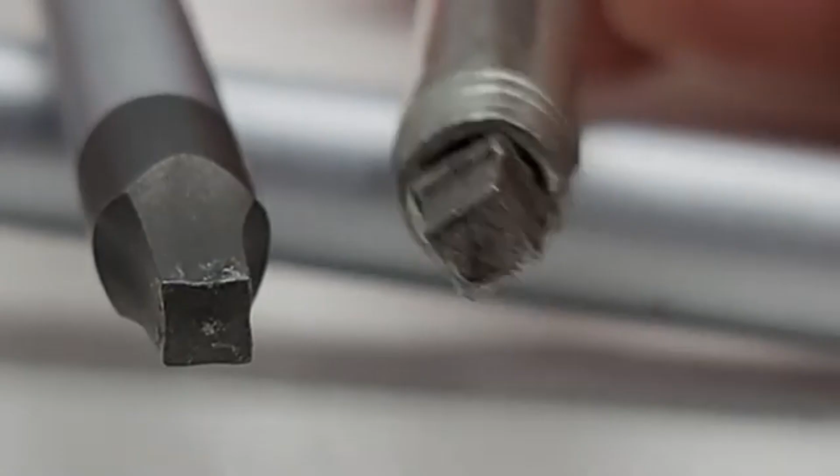In 1913, Henry Ford discovered a tiny piece of Canadian steel that was about to change the speed of global manufacturing. It was a cold-formed, square-drive fastener manufactured in a small brick factory in Milton, Ontario. At the time, Ford was building his automotive empire. Every second on the assembly line cost money.

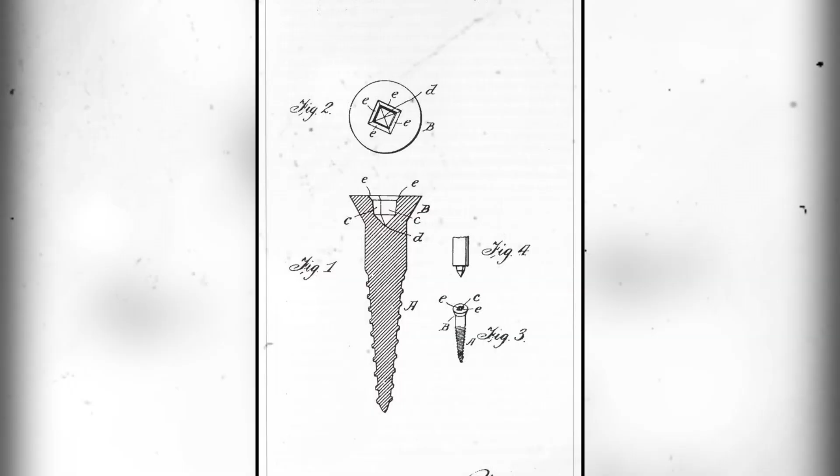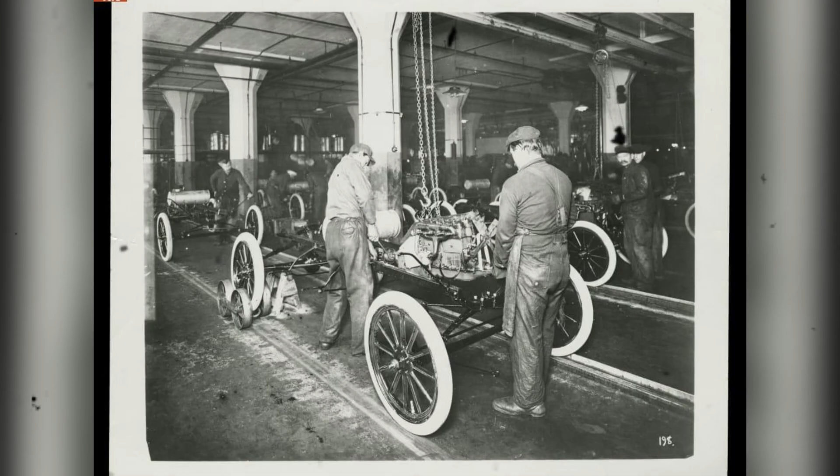When Ford engineers tested this new Canadian screw, they realized the square recess stopped the screwdriver from slipping. It allowed workers to drive screws blind, with one hand, at unprecedented angles. It saved the Ford Motor Company exactly 2 hours of assembly time per vehicle. Ford recognized the mechanical superiority immediately.

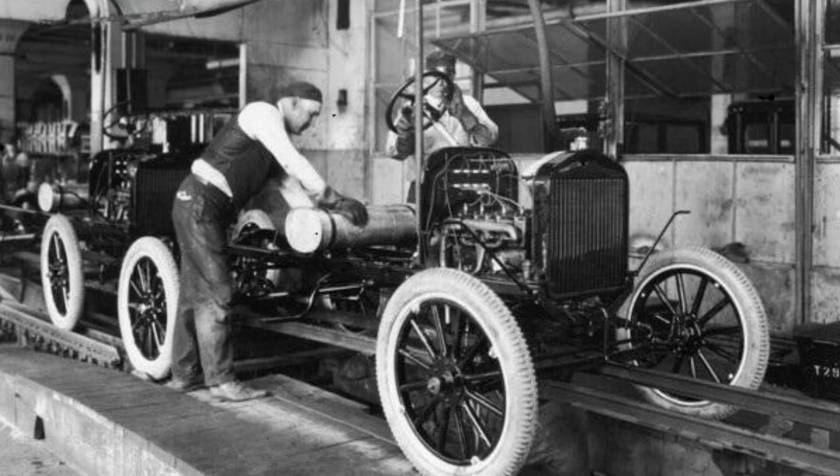He approached the inventor, a former salesman named Peter Lymburner Robertson, with a proposition. Ford wanted the screw. He wanted exclusive rights. He wanted to dictate the manufacturing terms, the licensing, and total control over where the fasteners went.

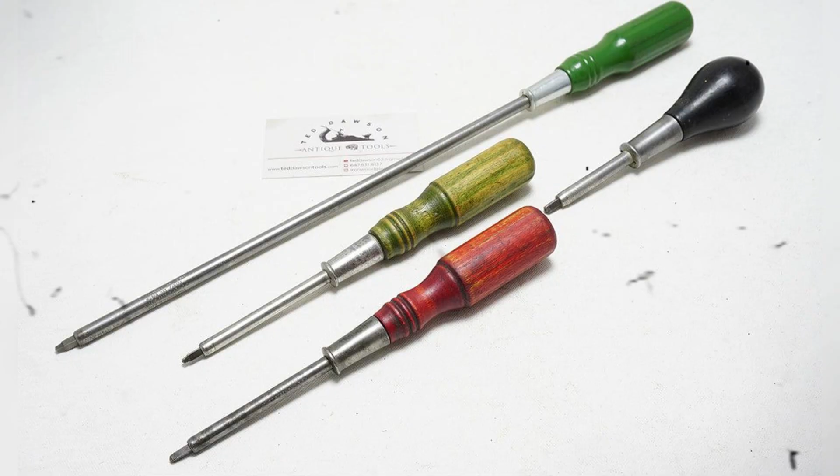Robertson refused. He refused to hand over his patents. He refused to cede control of his Milton factory to American industrial demands. He walked away from the most lucrative manufacturing contract in the history of the early automotive industry. That single refusal fundamentally fractured the North American hardware market. It created a strange, enduring industrial paradox.

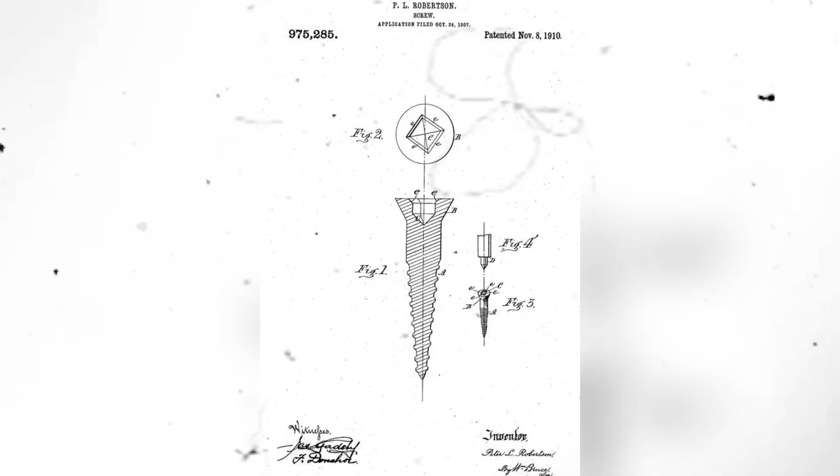To this day, the United States relies heavily on a universally frustrating, cam-out-prone crosshead design. But cross the northern border into Canada, and you will find an entirely different mechanical reality. In Canadian garages, on Canadian construction sites, and inside Canadian manufacturing plants, the Robertson square drive screw achieved absolute dominance. It became the unofficial fastener of an entire nation.

But the cost of that national dominance was international obscurity and the eventual dismantling of the very factory that brought it into existence.

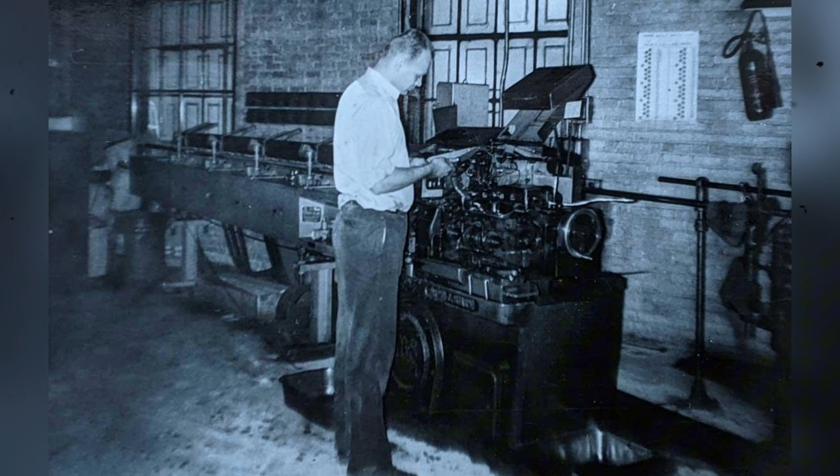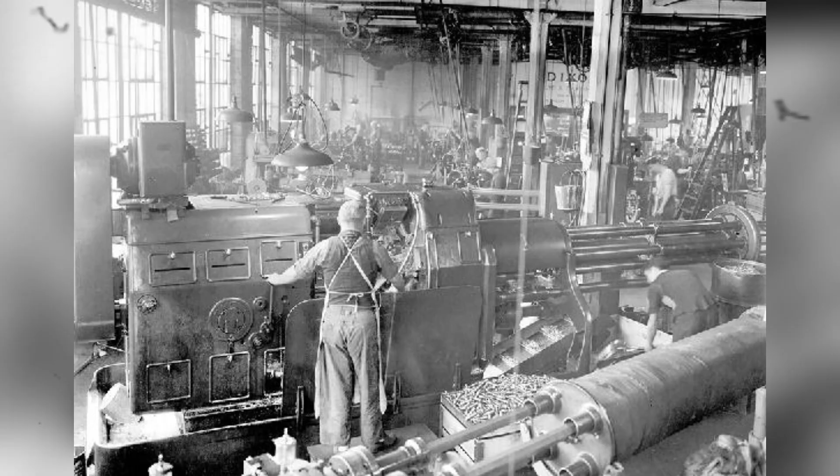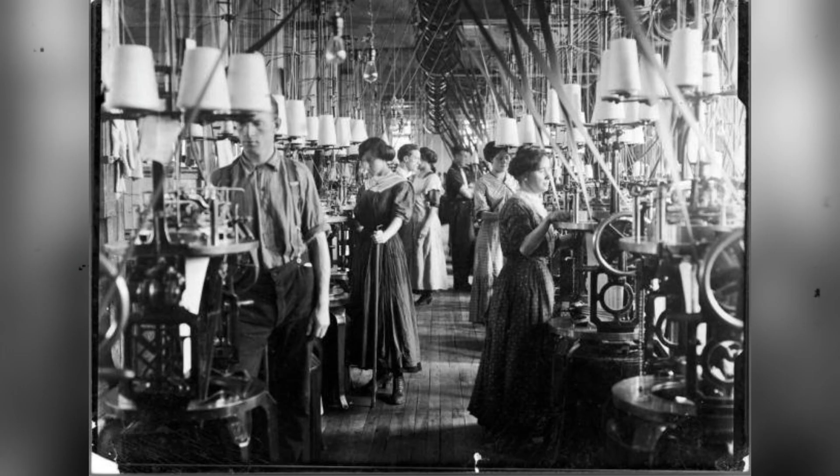Now let us return to the exact moment Peter Robertson realized the shape of the future. The year was 1907. Peter Lymburner Robertson, a traveling salesman born in Seneca Township, Ontario, was standing in a workshop demonstrating a new spring-loaded screwdriver. He positioned the tool. He applied downward pressure.

Without warning, the flat blade slipped violently from the shallow slot of the screw head. The steel plunged directly into his hand. The cut was deep. The bleeding was immediate. Robertson wrapped his hand, stopped the demonstration, and walked away with a profound mechanical revelation. That single physical wound exposed an industrial bottleneck that was quietly costing North American factories millions of dollars in lost time and damaged goods.

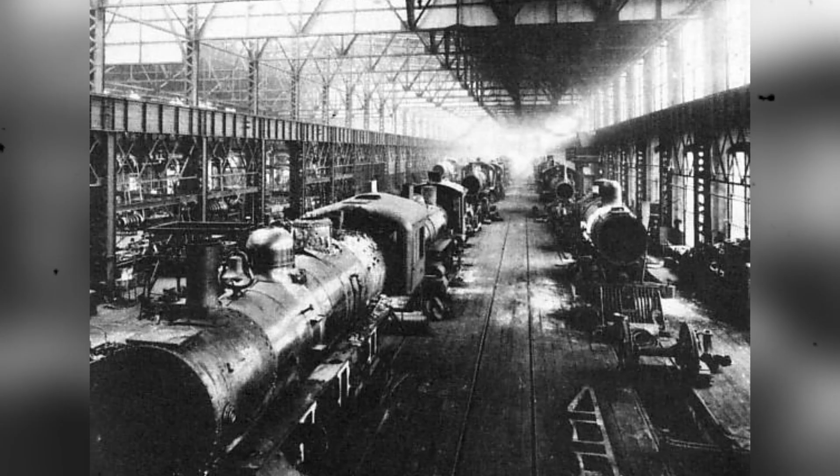Before Robertson filed his patents, the Canadian hardware landscape was entirely dominated by a single, fundamentally flawed fastener, the slotted screw. By the early 20th century, Canadian manufacturing was accelerating. Foundries in Hamilton were pouring steel. Furniture makers in southern Ontario were turning out thousands of chairs and cabinets. Boat builders in the Maritimes were assembling vessels at a rapid pace.

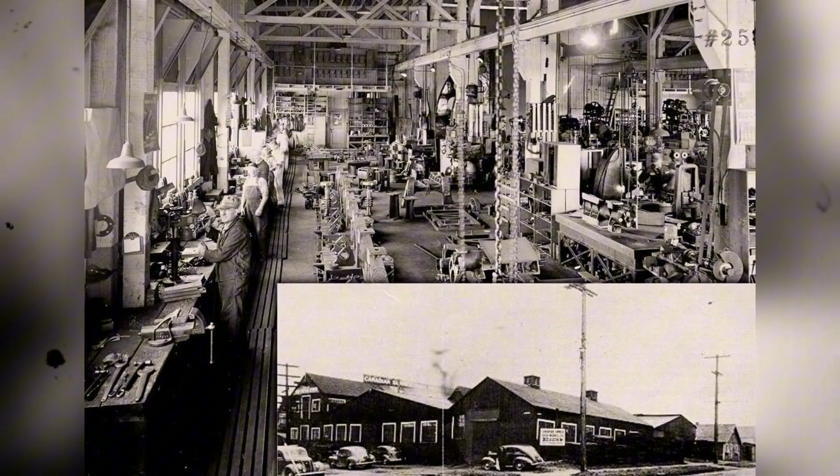Yet the entire industrial apparatus was held together by a screw design that had not changed since the 15th century. The slotted screw, or flathead, was cheap to manufacture because a simple saw could cut the groove. But mechanically, it was an absolute failure for high-speed assembly. It required two hands to drive, one to hold the fastener steady and one to turn the driver.

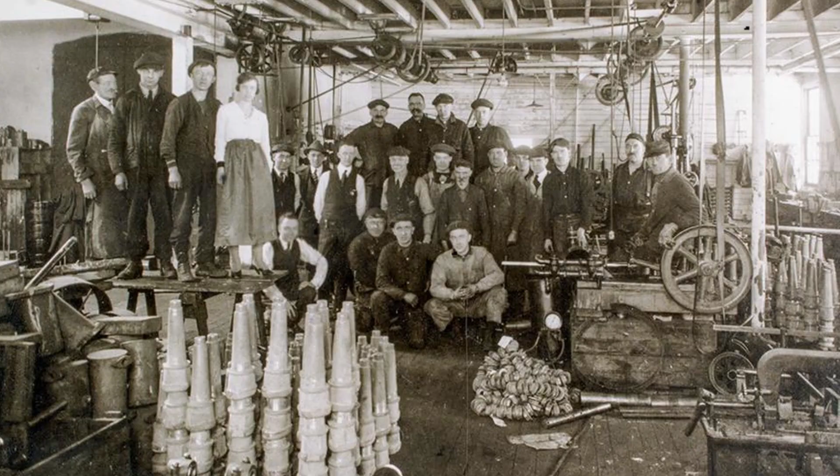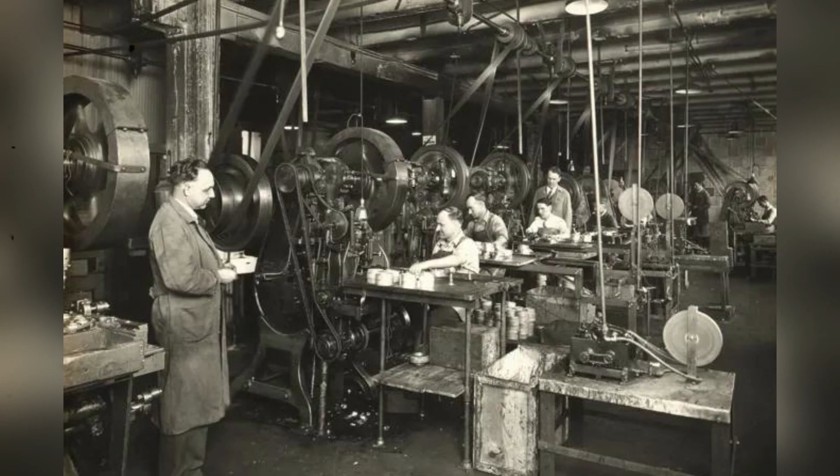The driver blade had no self-centering capability. If a mechanic applied too much torque, the blade cammed out. If a carpenter drove the screw too fast, the flathead stripped. When the blade slipped, it invariably gouged expensive mahogany, scratched finished metal panels, or, as Robertson knew firsthand, injured the worker. The slotted screw dictated the speed of Canadian industry, and that speed was slow.

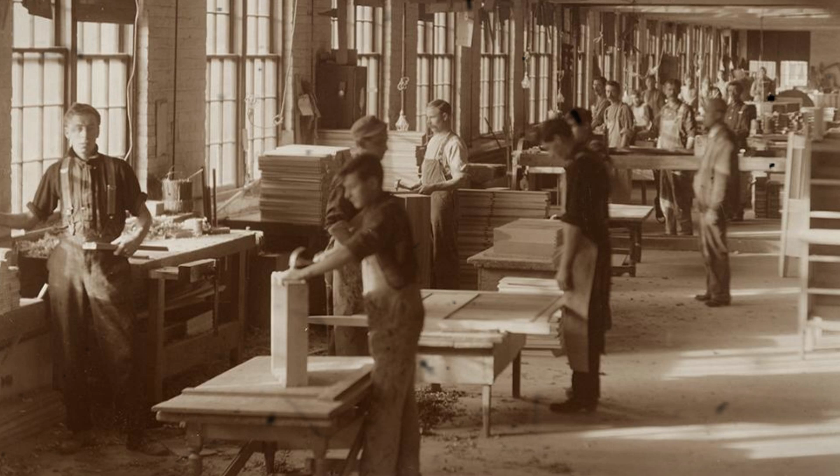Robertson understood that a square recess provided superior torque transfer. The straight walls of a square hole would trap the driver blade, eliminating side slip entirely. But the concept of an internal drive screw was not actually new. Inventors had drawn square drive screws for decades. The problem was not the geometry. The problem was the metallurgy. The engineering hurdle was manufacturing.

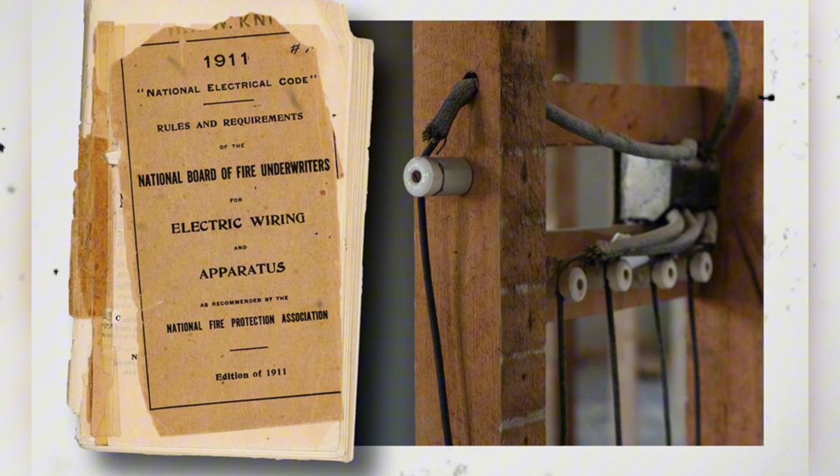To mass produce a screw, factories used a process called cold heading. A machine slammed a steel punch into a cold wire blank to form the head. If an inventor tried to punch a deep square hole into cold steel, the immense pressure caused the metal to fracture, or the punch would snap upon withdrawal.

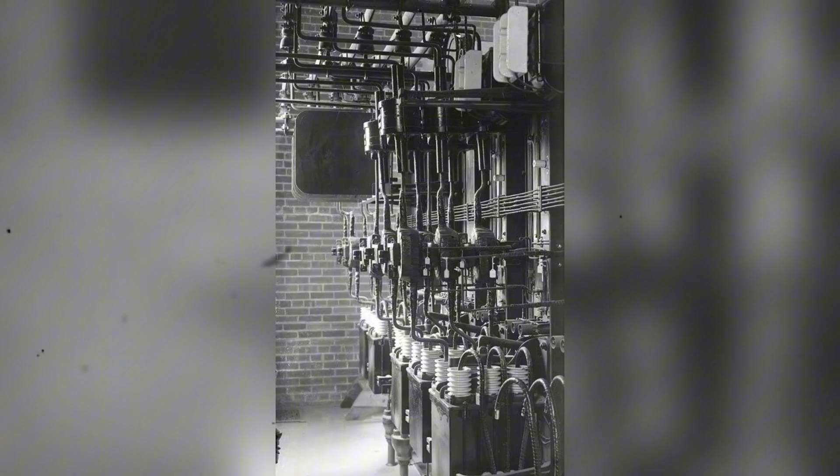Because of this manufacturing impossibility, the square drive screw remained an expensive, custom-machined novelty. It was useless to the massive factories springing up across Canada. Robertson solved the metallurgy problem with a subtle geometric trick. He did not punch a perfect square, he punched a tapered square.

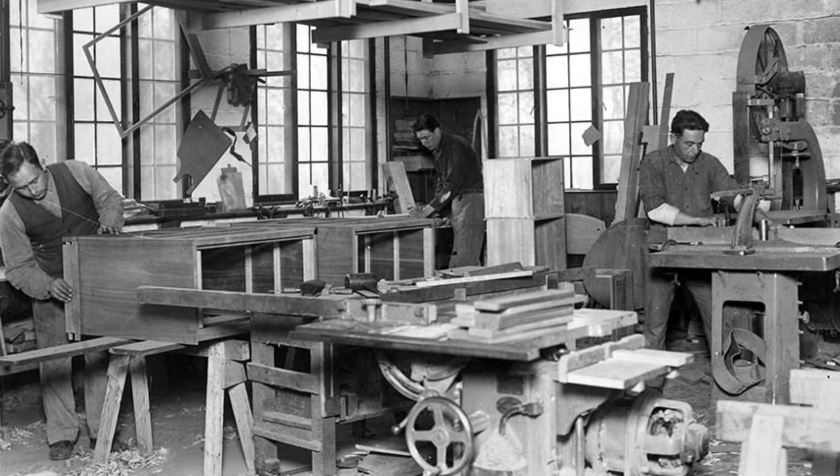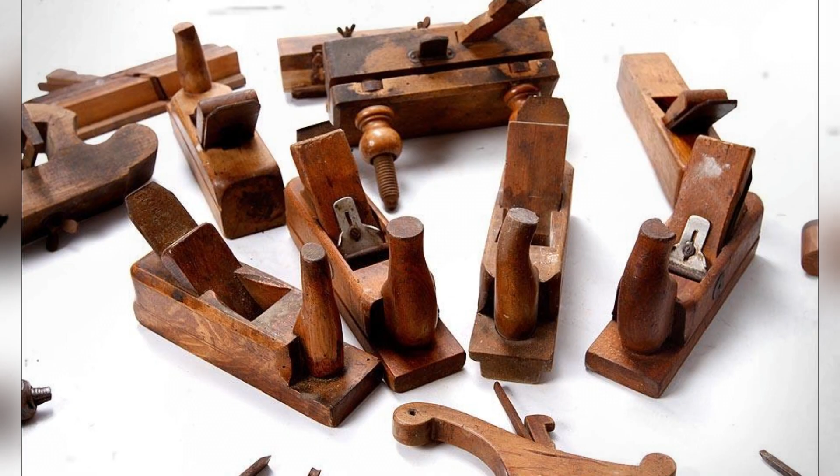By adding a slight chamfer to the corners and a taper to the inner walls of the recess, the cold-heading punch could strike the steel blank and withdraw smoothly without breaking. The taper prevented the steel from fracturing, but it also created an accidental, brilliant side effect. The tapered walls meant that when a matching screwdriver was inserted, the friction wedged the tool and the screw together.

A worker could place a screw on the tip of the driver, hold it horizontally, or even point it straight down, and the screw would not fall off. It was a friction fit. For the first time in mechanical history, a screw could be driven entirely blind, with one hand.

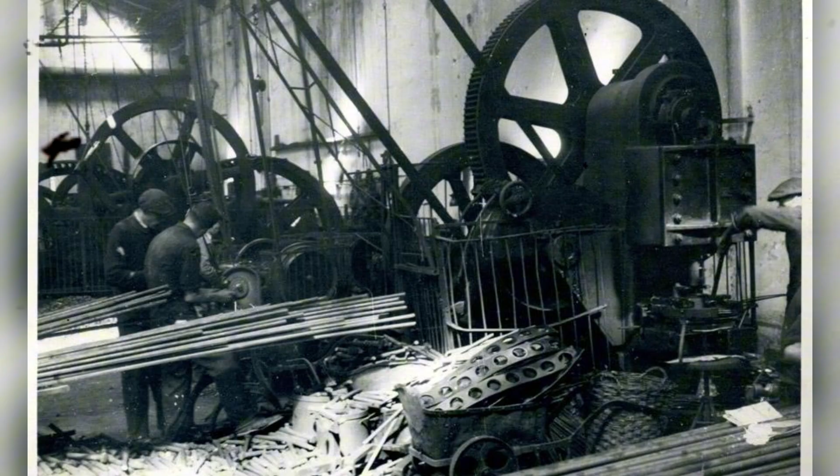In 1908, armed with his patented cold-forming technique, Robertson established the P.L. Robertson Manufacturing Company. He chose Milton, Ontario, a small town west of Toronto. Milton offered crucial advantages: proximity to the expanding industrial centers of Ontario, favorable tax conditions, and direct access to railway lines that could distribute heavy kegs of steel fasteners across the country.

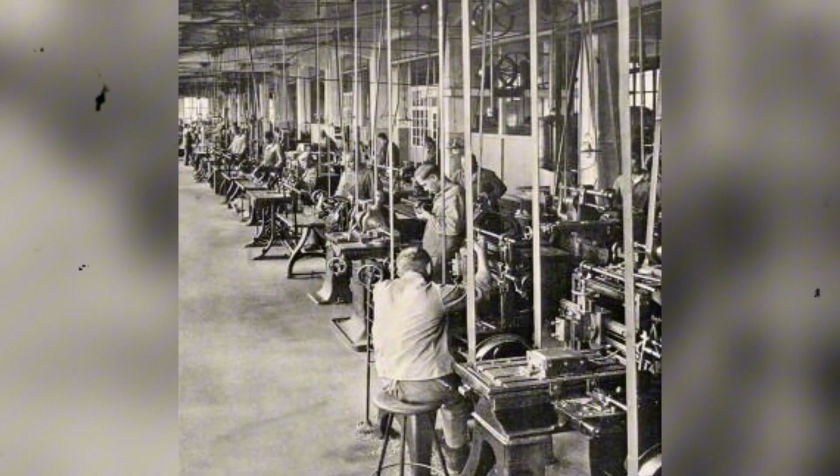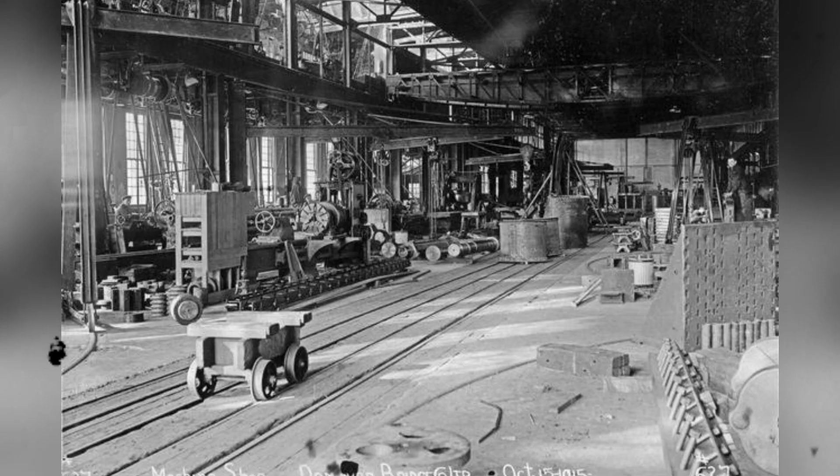The early reception in the Canadian market was a mixture of deep skepticism and sudden, absolute conversion. Local hardware stores in Ontario initially resisted. The Robertson screw required the purchase of a new, specialized screwdriver, an irritating barrier to entry for mechanics who already owned standard flathead drivers. But the first industrial buyers quickly realized the economics of the taper.

When a cabinet-making shop in Toronto tested the first commercial batches from the Milton factory, the results were undeniable. Workers no longer needed to pre-drill pilot holes with absolute precision. They did not have to stop to inspect gouged wood. The Milton factory produced a fastener that allowed carpenters to sink screws twice as fast. Word spread through the Canadian trades.

Electricians discovered they could drive Robertson screws into tight junction boxes with one hand, holding a wire with the other. Plumbers used them in cramped crawl spaces where a slipping slotted driver would mean bruised knuckles. Within 2 years, the P.L. Robertson Manufacturing Company was pulling in orders faster than the cold-heading machines could punch them out. The Milton factory began expanding.

The local workforce swelled. The square drive screw was no longer just an Ontario invention. It was rapidly becoming the foundation of Canadian assembly lines. It represented a distinct departure from traditional toolmaking. It was a precise, unyielding piece of geometry that perfectly suited the cold, pragmatic demands of industrial production.

The Canadian tool market had found its perfect fastener, but the true test of the Milton factory would not come from local carpenters or hardware store clerks. It would come from the most ruthless manufacturing environment on Earth, the emerging automotive assembly line.

To understand why a simple fastener conquered the Canadian industrial landscape, you have to examine the physical geometry of the tool itself. The Robertson screw was not merely a square hole punched into a metal head. It was a highly engineered, truncated pyramid. The 4 internal walls sloped slightly inward, tapering to a flat bottom. This specific taper was the core technological breakthrough. It provided absolute mechanical certainty.

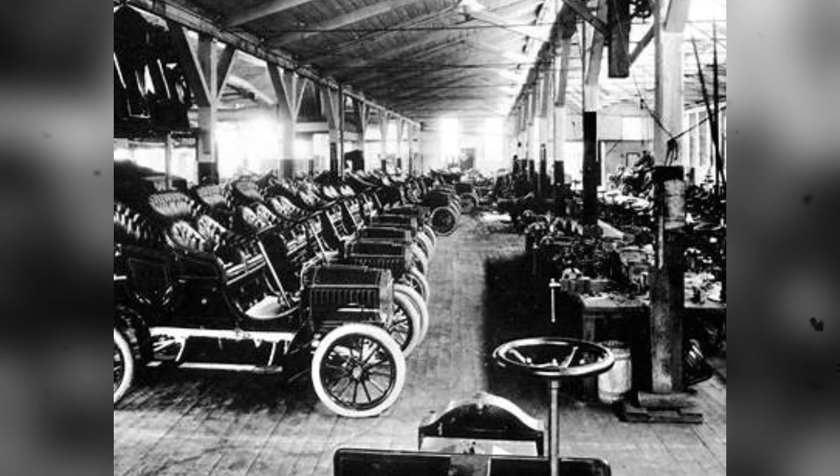When a worker inserted a Robertson screwdriver into the screw head, the tapered tip wedged tightly against the tapered walls of the recess. This created a friction fit, a temporary mechanical bond between the tool and the fastener. The worker could place the screw on the end of the driver and suspend it in midair. It would not fall. More importantly, the square recess entirely eliminated a destructive physical phenomenon known as cam-out.

Cam-out occurs when the rotational force of a screwdriver pushes the blade up and out of the screw head, causing the tool to slip. Slotted screws required constant, heavy downward pressure to prevent cam-out. The Robertson square drive required almost none. The rotational force was captured perfectly by the straight sides of the square.

In the early 1910s, this geometric advantage collided with the birth of modern mass production. The defining testing ground was not a small woodworking shop, but the sprawling industrial floors of the automotive industry. Ford Motor Company had established a major manufacturing plant in Walkerville, Ontario, right across the river from Detroit. The Walkerville plant was tasked with assembling the Model T for the Canadian market and the broader British Empire.

Automobile manufacturing in this era relied heavily on wood. The frames, the interior paneling, and the structural supports were secured by thousands of individual wood screws. Using slotted screws on a moving assembly line was a slow, hazardous process. Workers constantly stripped the screw heads, requiring them to stop, extract the damaged fastener, and start over. If a flathead driver slipped, it gouged the finished wooden panels, resulting in expensive scrap materials.

When the Walkerville Ford plant procured its first bulk orders of Milton-made Robertson screws, the assembly metrics changed overnight. Because of the friction fit, a Canadian assembly line worker could reach into a canvas apron, place a Robertson screw on the tip of his driver, and drive it straight into a wooden chassis frame with one hand. He could drive screws horizontally, vertically, or entirely blind in the dark recesses under the vehicle dashboard. There was no slipping. There was no cam out. The driver stayed locked in the recess until the screw was fully seated.

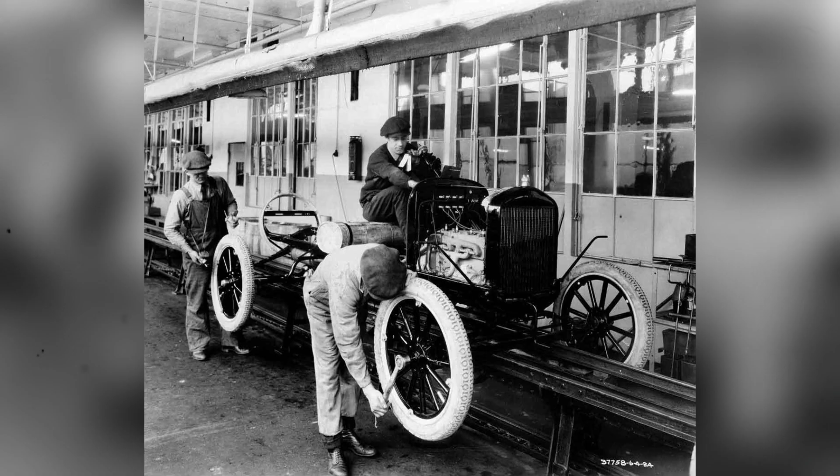Internal efficiency reports from the Walkerville plant revealed a staggering number. By switching from traditional slotted screws to Robertson square drive screws, the Canadian factory saved exactly 2 hours of assembly time per vehicle. In the high-volume, low-margin world of automotive manufacturing, 2 hours of labor savings per unit was an unprecedented economic triumph. The initial unit cost of a Robertson screw was slightly higher than a slotted screw. The cold-forming process required specialized steel and more precise machinery, but the Canadian price context rendered that initial cost irrelevant. The labor time saved on the factory floor instantly absorbed the higher purchase price.

The Fisher Body Company, a massive automotive coach builder operating a facility in Windsor, Ontario, recognized the same mathematics. They adopted the Robertson screw for their wooden car bodies. Stripped screws and ruined wood panels practically disappeared from their production lines. The breakthrough rapidly expanded beyond the automotive sector. The Canadian Pacific Railway, operating out of the massive Angus shops in Montreal, adopted the square drive screw for the construction of their passenger rail cars. Rail cars endured relentless daily vibration. Slotted screws often could not be driven tight enough to withstand the shaking, and they slowly backed out over time. The Robertson drive allowed railway mechanics to apply maximum torque, securing the wooden interiors firmly against the steel frames.

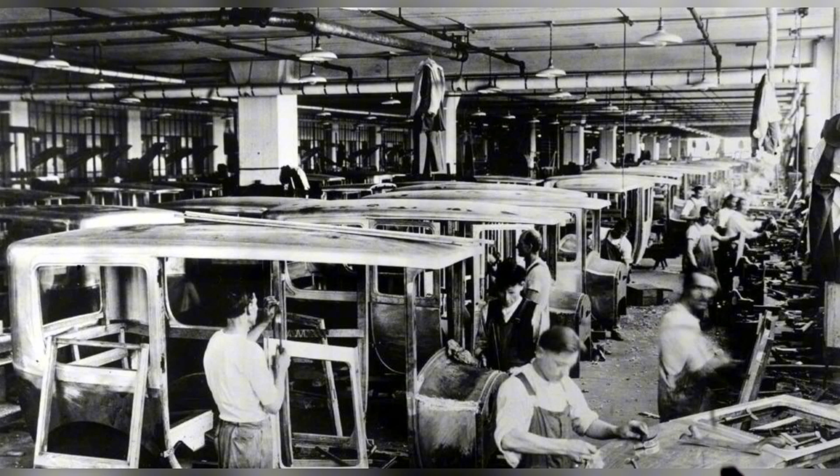In southwestern Ontario, the furniture factories of Stratford abandoned slotted screws in favor of the Milton fasteners. Fine hardwood cabinetry demanded precision. A single slipped flathead driver could destroy a mahogany dresser door. The Robertson screw protected the material, accelerated the cabinet makers, and fundamentally changed the speed of Canadian furniture assembly. Boat builders in the Muskoka region adopted them for marine construction, driving brass Robertson screws deep into wooden hulls where wet hands and tight angles made two-handed fastening impossible. By 1913, the Robertson screw had established a formidable Canadian moat. It was the undisputed standard for high-volume manufacturing across the nation.

This absolute dominance caught the attention of Henry Ford himself. Recognizing the 2 hours of saved assembly time at his Canadian facility, Ford sought to implement the Robertson screw across his entire American manufacturing empire. He requested a meeting with P.L. Robertson. The American industrialist presented a ruthless proposition. Ford wanted to use the square drive screw in his Highland Park plant in Michigan, but he demanded total control. He required the right to manufacture the screws himself in the United States, or he demanded exclusive licensing rights that would effectively turn the Milton operation into a captive subsidiary of the Ford Motor Company.

Robertson refused. He had recently lost European patent rights due to a bad licensing deal in England, and he was fiercely protective of his remaining control. He refused to hand over his manufacturing independence. He refused to let the Ford Motor Company dictate the future of his invention. Robertson walked away from the negotiation table, withdrew from the American automotive market, and returned to his brick factory in Ontario. Henry Ford ordered his American plants to find another solution. The Walkerville plant in Canada continued using the Robertson screw, but the vast, expanding American automotive industry was firmly shut out. This single refusal drew a hard, permanent boundary line.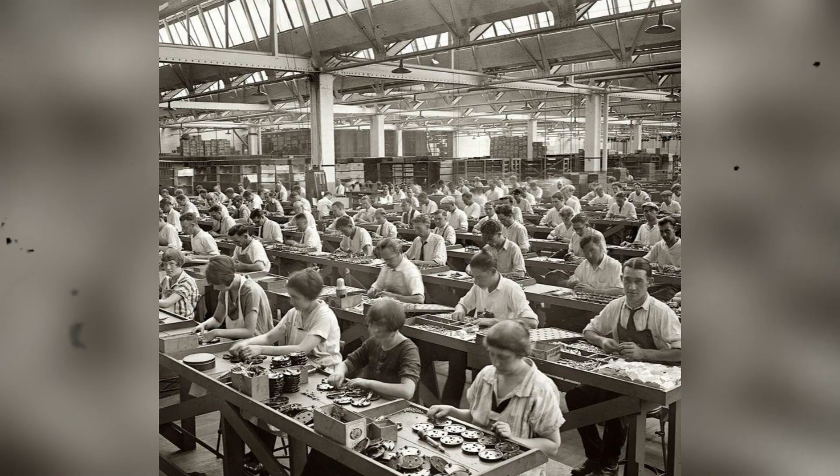It sealed the Robertson screw inside the Canadian market. It was a decision that preserved the independence of the P.L. Robertson Manufacturing Company. It protected the jobs in Milton. It ensured that the square drive screw would become a distinctly Canadian phenomenon. But by locking the American industrial machine out, Robertson unknowingly planted the seeds for his company's eventual systemic isolation.

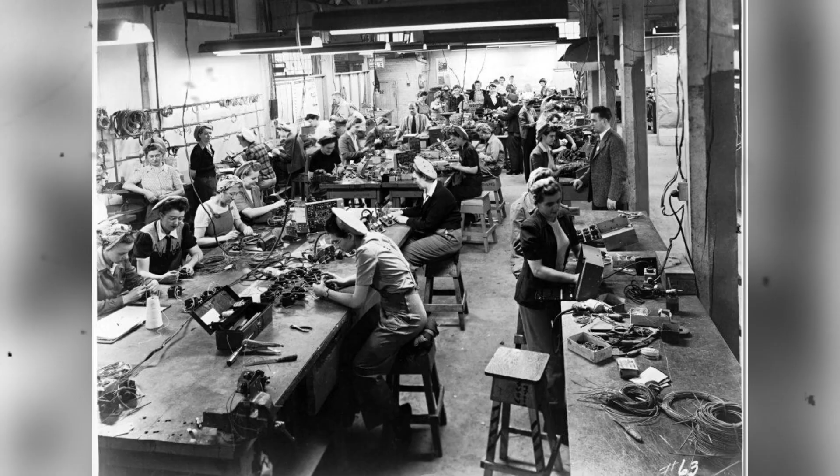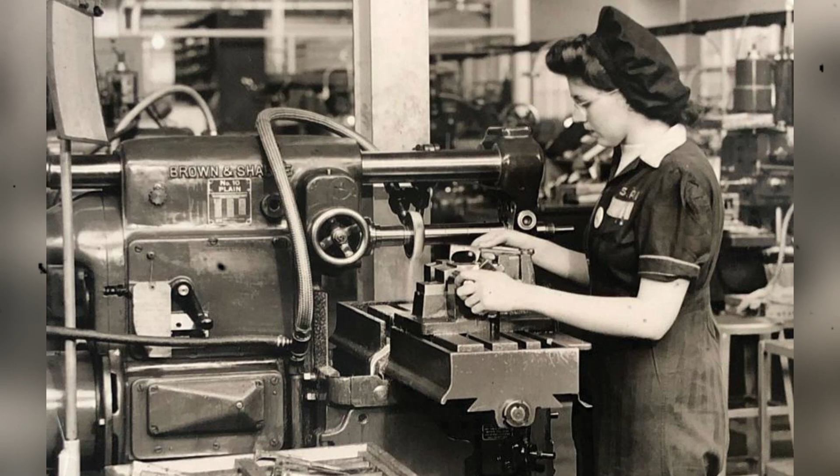By the early 1930s, the P.L. Robertson Manufacturing Company had transformed from a promising local enterprise into the undisputed mechanical heart of Canada. The refusal to surrender to Henry Ford did not destroy Peter Robertson. Instead, the rejection of the American automotive market forced the company to turn inward, conquering every single remaining inch of the Canadian industrial, commercial, and retail landscape. In Milton, the factory expanded into a sprawling, multi-acre brick complex. The rhythmic, deafening thud of massive cold-heading machines echoed across the town 24 hours a day, operating in continuous, unyielding shifts.

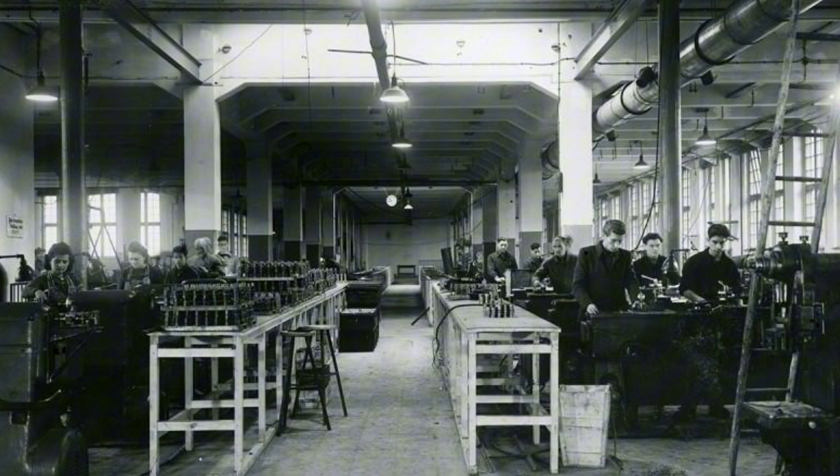Robertson was no longer just a toolmaker. He was the primary economic engine of Milton. The company built houses for its rapidly expanding workforce. It paved the local dirt streets. It funded the construction of the Milton Hospital. The town and the tool factory were inextricably bound together, operating in absolute synchronization to feed a nation's insatiable demand for the square drive fastener.

The scale of production reached staggering, unprecedented metrics. The Milton plant was consuming hundreds of tons of raw steel wire every single week. Massive spools of steel were fed into the headers, punched, threaded, heat-treated, and poured into heavy wooden kegs. At its peak, the factory was churning out millions of individual screws every day.

Walk into Aikenhead's Hardware in downtown Toronto during the 1940s, and the traditional slotted screw had been relegated to the back shelves, sold mostly to American tourists or for the repair of antique furniture. The prime retail space, the front aisles, and the heavy bulk bins were entirely dominated by the Robertson drive.

In Montreal, Pascal Hardware distributed thousands of kegs of Milton fasteners to Quebec construction crews. Western Canadian retailers, supplied by the sprawling transcontinental railway networks, brought the square drive to the booming prairie cities and the expanding logging camps of British Columbia.

The true glory of the Robertson Empire was its absolute, unquestioned adoption by the Canadian trades. It was a level of market saturation that most global toolmakers could only dream of achieving. The company introduced a brilliantly simple, color-coded handle system for their screwdrivers that became a permanent part of the Canadian industrial vocabulary. The number 0 driver was yellow, the number 1 was green, the number 2 was red, the number 3 was black.

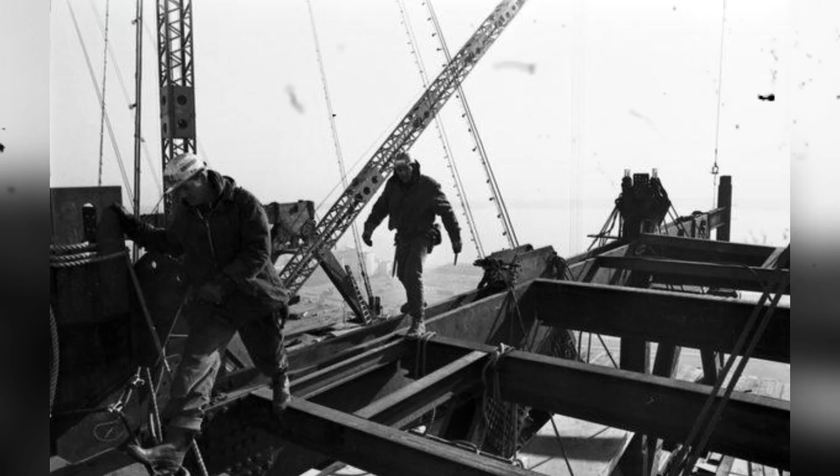Electrical junction boxes, switch plates, breaker panels, and heavy conduit brackets across the nation were manufactured exclusively with Milton forged screws. The Canadian carpenter completely abandoned the flathead. During the massive post-war housing boom of the 1950s, framing crews, roofers, and finish carpenters relied heavily on the green-handled number 1 and the red-handled number 2 drivers.

When Beaver Lumber supplied the raw materials for hundreds of thousands of new suburban homes across the provinces, the accompanying hardware was stamped in Milton. Plywood subfloors were screwed down with Robertson drives. Kitchen cabinets were hung with Robertson drives.

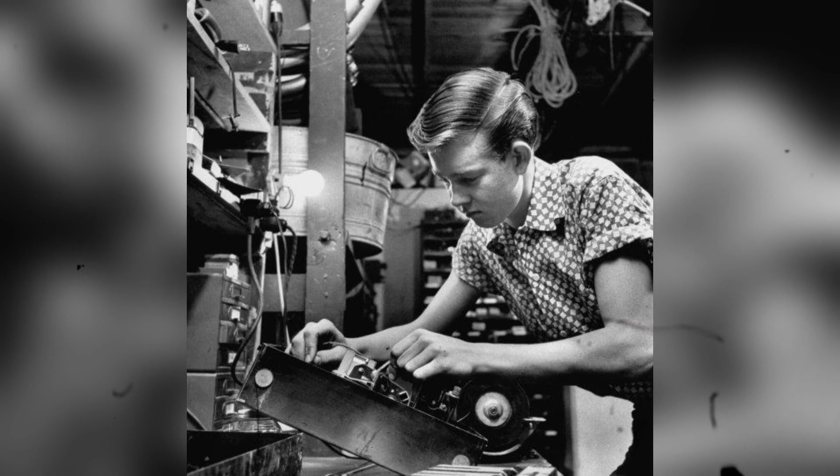The Canadian marine industry, operating out of the massive naval shipyards in Halifax, and the specialized recreational boat builders in Ontario's cottage country, drove millions of brass and bronze Robertson screws into wet, unforgiving lumber. The friction fit allowed shipwrights to drive fasteners deep into the hulls while hanging off scaffolding over the water.

The peak Canadian workshop experience was not defined by the roar of a new power saw, but by the silent, perfectly seated friction fit of a red-handled driver locking flawlessly into a Milton forged screw. This was the zenith of the empire. The square drive screw was not just a highly successful commercial product. It was the absolute defining standard of Canadian hardware. It was an unbreakable mechanical monopoly built on superior geometry.

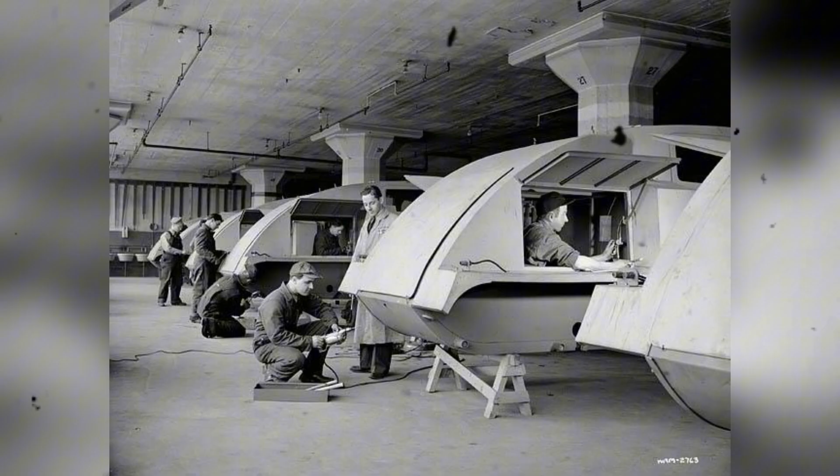But while the Milton factory pumped out millions of fasteners a day to secure the borders of its Canadian kingdom, a different, deeply flawed industrial standard was quietly conquering the rest of the world. The isolation of the Canadian market was absolute.

While the American manufacturing sector grudgingly adopted the Phillips head screw in the 1930s, a design fundamentally engineered to cam out and prevent over-torquing on early, unrefined assembly lines, Canadian industry refused to regress. The Milton factory had already provided a superior solution. The Canadian mechanic did not want a tool designed to fail. They wanted the Robertson. While the American mechanic spent the post-war boom cursing stripped crossheads and drilling out ruined fasteners, the Canadian mechanic worked in rapid, uninterrupted silence.

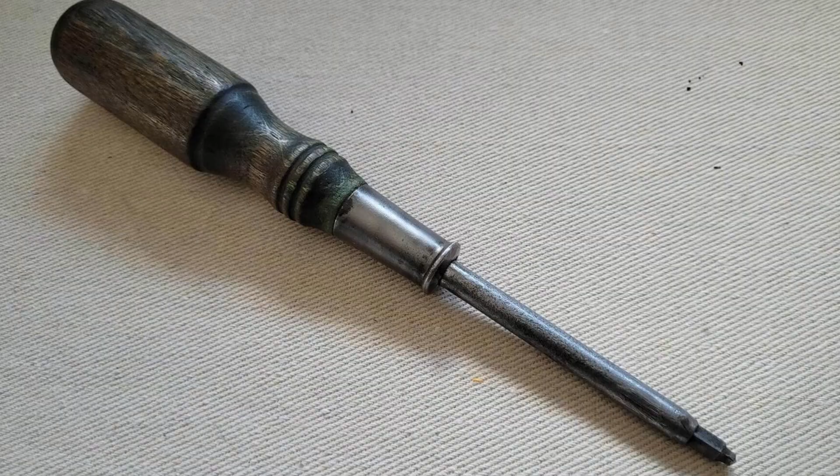Walk down the hardware aisle of an early Canadian Tire store in 1955, and the visual evidence of this victory was overwhelming. Row after row of heavy cardboard boxes, each stamped with the Milton, Ontario manufacturing mark, filled the shelves. The Phillips screw was treated as an unwanted foreign invader, stocked only as a necessary evil for repairing imported American appliances or servicing American cars.

The cultural saturation went deep into the educational system. In the technical schools of Ontario and Quebec, vocational instructors did not even bother teaching students how to drive a slotted screw properly.

It was considered a dead technology. Apprentices were handed a green number 1 and a red number 2 Robertson driver on their first day. The curriculum was standardized around the square drive. The trade unions demanded them. The construction contractors budgeted for them.

The P.L. Robertson Manufacturing Company was not just producing a fastener. It was holding together the entire physical infrastructure of the Canadian mid-century economic boom. If this company faltered, if this factory closed, Canada would lose the one piece of perfect mechanical logic that separated its workshops from the rest of the world. The scale of this dependency was visible in every sector.

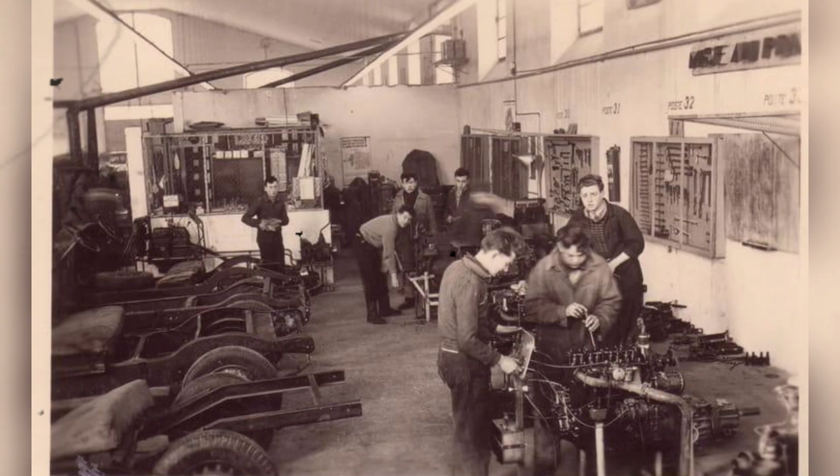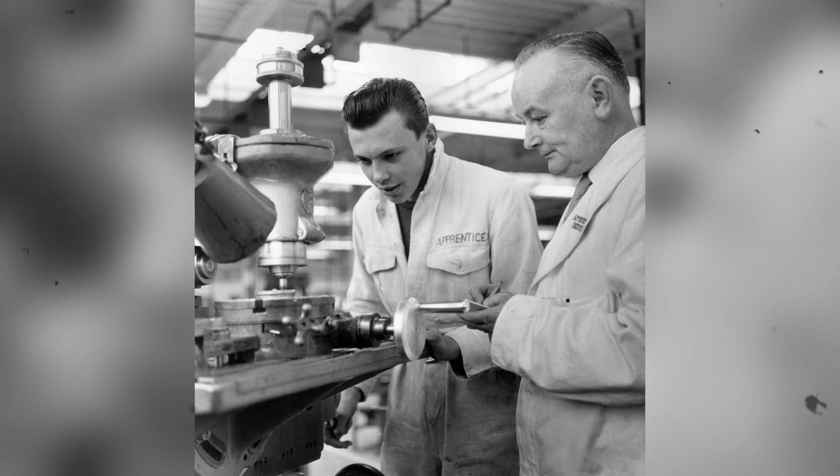The mobile home and trailer manufacturing boom of the early 1950s, centered in small towns across Alberta and Ontario, relied heavily on Robertson fasteners to secure lightweight wood paneling to metal frames. The relentless vibration of a trailer on the newly built Trans-Canada Highway would shake a slotted screw loose within miles. The Robertson, driven tight with its superior torque, held the Canadian road.

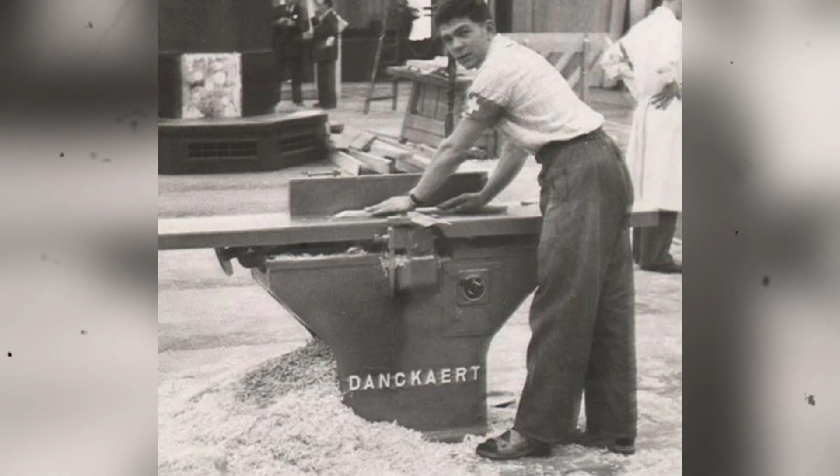Furthermore, the Canadian agricultural sector heavily adopted the square drive. Tractor repair shops in Manitoba stocked Robertson machine screws to replace the stripped factory hardware on imported farm equipment. The square recess meant a farmer could clear a screw head packed with hardened prairie mud using a simple nail, and the driver would still engage perfectly. A Phillips head, once filled with debris, was almost impossible to clear and drive in the field. The Robertson was an all-weather, all-condition fastener.

The Milton factory was running at maximum capacity. The peak metric of this Canadian dominance was almost incomprehensible. By 1950, the plant was producing billions of square drive fasteners annually. It was estimated that over 80% of all wood and machine screws sold in Canada bore the distinct tapered square recess. The Milton facility had grown into a self-sustaining industrial ecosystem. It was an era when the phrase "made in Canada" still represented the absolute pinnacle of hand tool engineering.

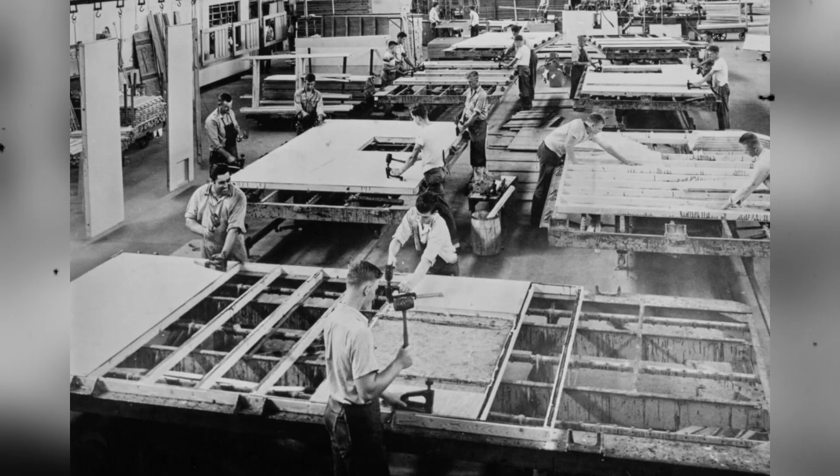The adoption was so total, so culturally ingrained, that a generation of Canadian tradesmen grew up entirely unaware that the Robertson screw was a local anomaly. A carpenter in Calgary simply assumed that when a builder in Chicago or London reached for a screw, they reached for a Robertson. It was the standard. Nothing else made mechanical sense.

But this empire was structurally fragile. The failure to secure the American market with Henry Ford had confined the Robertson screw to a geographical island. P.L. Robertson had built a massive, highly specialized manufacturing machine that relied entirely on the continued loyalty of the Canadian retail and industrial sectors. As long as Robertson was alive, and as long as the Canadian borders remained somewhat protected by trade tariffs and logistical distance, the Milton factory was a fortress.

However, the forces of international toolmaking were shifting. The original patents that had protected the precise taper of the Robertson square drive had expired. Giant American hardware corporations were looking north, eyeing the lucrative Canadian retail shelves. They possessed massive economies of scale, producing inferior screws at a fraction of the cost. And inside the red brick walls of the Milton plant, time was running out for the uncompromising founder.

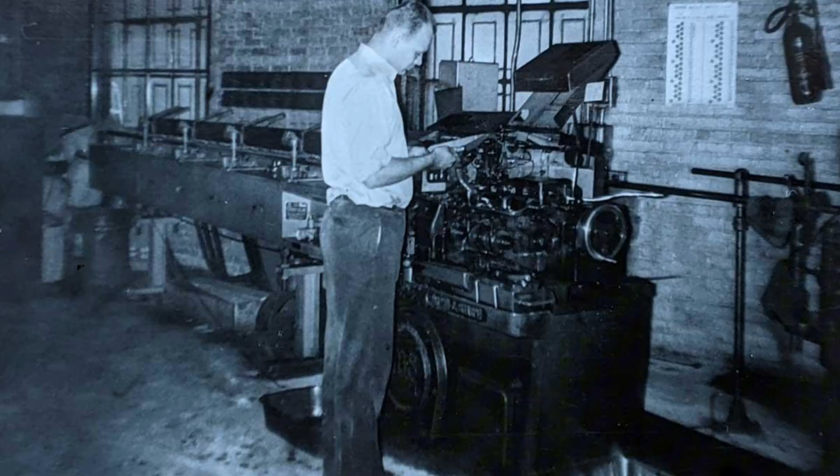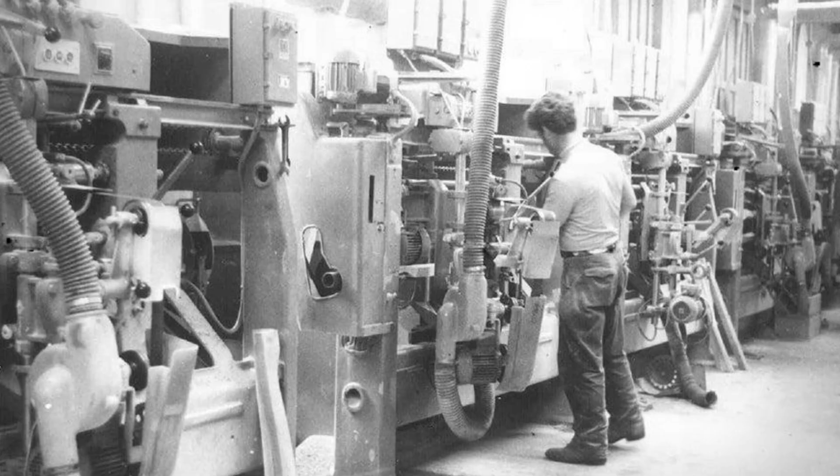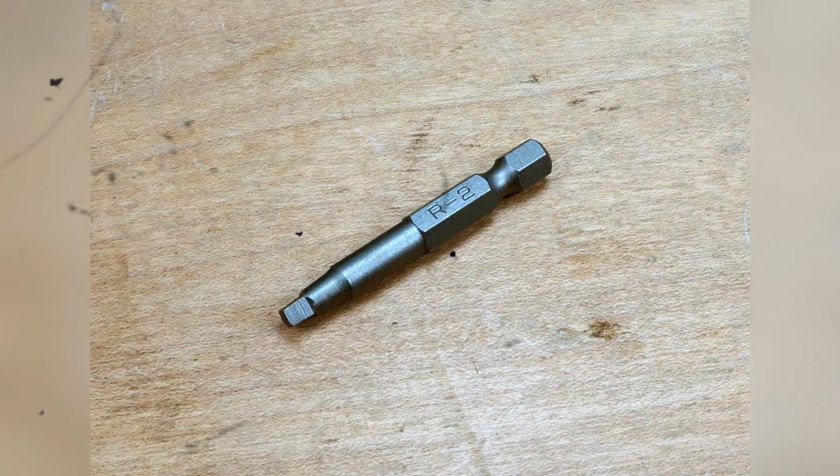In 1951, Peter Lymburner Robertson died at the age of 72. He left behind a thriving industrial town, a universally beloved tool, and a fiercely independent company. But without his absolute stubborn control, the fortress doors were suddenly unlocked. The golden era of the Canadian toolmaking empire had reached its absolute summit. The long, slow, systematic dismantling of the Milton plant was about to begin.

In 1951, Peter Lymburner Robertson died at the age of 72. His death was not merely the loss of an inventor, it was the collapse of the most formidable defensive wall surrounding the Milton factory. For over 4 decades, Robertson had governed his company with absolute, uncompromising control. He had refused Henry Ford. He had rejected Wall Street investors. He had denied any engineering concessions that would trade mechanical perfection for short-term profit.

But when he died, the sheer force of his stubborn independence vanished. The wealth and control of the company transferred, and the boardroom doors swung open to the very financial forces Robertson had spent his life fighting. The decline of the Canadian square drive empire was not a sudden, fiery collapse. It was a slow, systematic erosion driven by patent expirations, corporate absorption, and the ruthless math of modern retail.

In the 1960s, the core patents protecting the precise, tapered geometry of the Robertson recess expired. The perfect mechanical design, which had granted Milton an untouchable monopoly in the Canadian tool market, suddenly became public domain. The legal barrier was gone.

Any steel plant in Ohio, any cold-heading facility in Asia, and any multinational corporation had the legal right to manufacture square drive screws. But instead of triggering a war over engineering quality, the market initiated a ruthless race to the bottom in price.

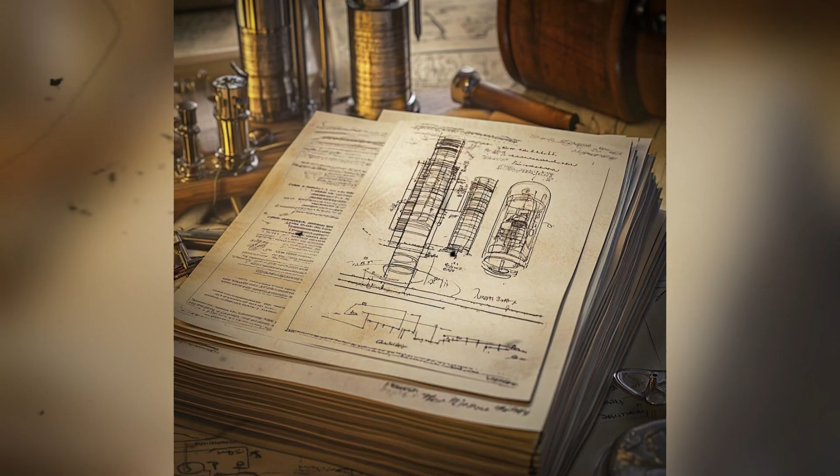This corporate absorption collided with a massive structural shift in hardware retail. Throughout the first half of the 20th century, Robertson's distribution relied on independent hardware stores, regional industrial suppliers, and the Canadian railway network. But moving into the 1970s and 1980s, the rise of massive big-box retail chains shattered that traditional structure. The big-box stores changed the rules. They controlled the aisles, they controlled the shelf space, and most importantly, they demanded catastrophic reductions in wholesale pricing.

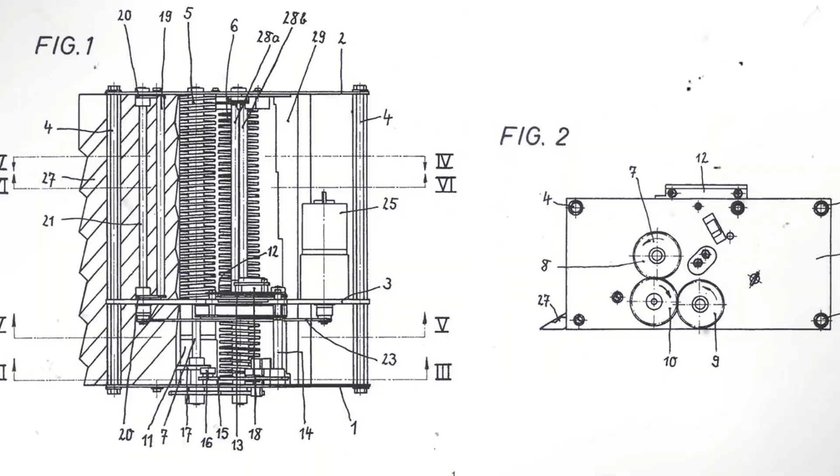These retail giants quickly realized a harsh mathematical truth. With the patents expired, they were no longer obligated to buy genuine Milton-stamped boxes. Instead, they began sourcing private label hardware from overseas. A flood of cheap imported square drive screws hit the Canadian market. This influx of foreign hardware dealt a devastating blow to the Milton plant. The imported fasteners were cheaper because they used inferior steel alloys and were produced by cheap labor.

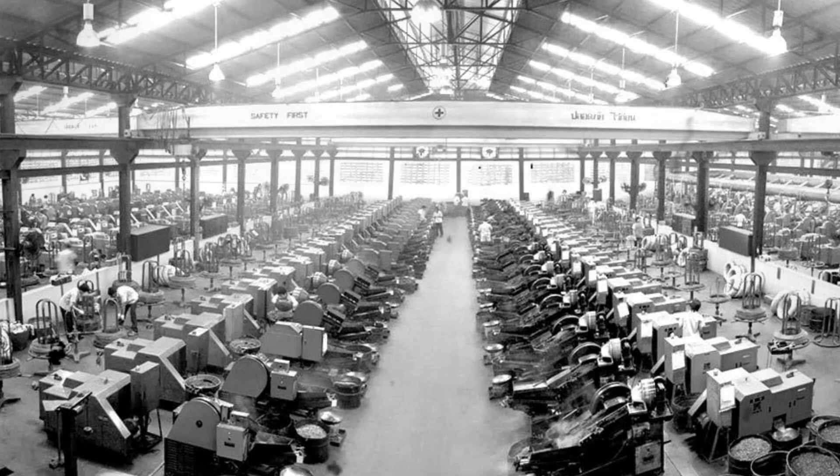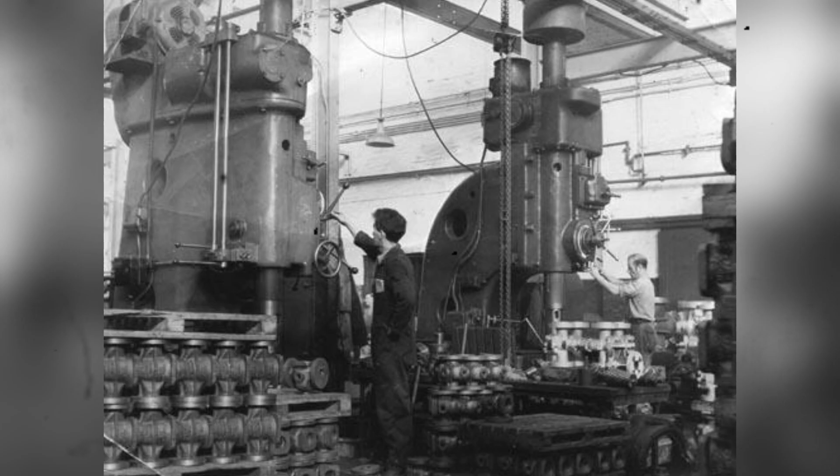More importantly, to save time during the cold-forming process, foreign manufacturers often skipped the delicate, differential taper inside the square recess, the exact geometric detail that created the perfect friction fit. But to the purchasing managers at the big box chains, this loss of mechanical grip was irrelevant compared to the massive profit margins. When a construction contractor bought hundreds of thousands of screws for a housing project in suburban Toronto, a few dollars saved per keg instantly decided the contract.

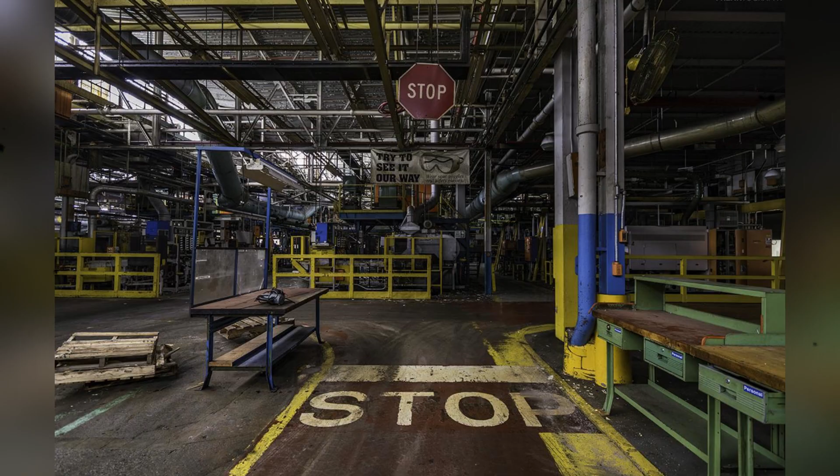This competitive displacement did more than erode revenue. It eroded the mechanical truth of the tool. Millions of Canadian carpenters, electricians, and mechanics began driving cheap, imported square drive screws, and they noticed the drivers slipping, the corners rounding, and the fasteners failing to hold. They did not know they were using a flawed copy. They just saw a square hole and assumed the quality of Robertson had collapsed. The ultimate symbol of Canadian mechanical perfection was being diluted by its own shape.

As contracts were canceled and orders dropped, the once glorious factory began to shrink. The relentless noise of the cold-heading machines was replaced by long periods of silence. Night shifts were canceled. Veteran machinists were laid off. The company acted according to basic survival logic. They sold off assets, they cut costs, and they compromised. But the retreat of the Canadian tool-making empire was only just beginning.

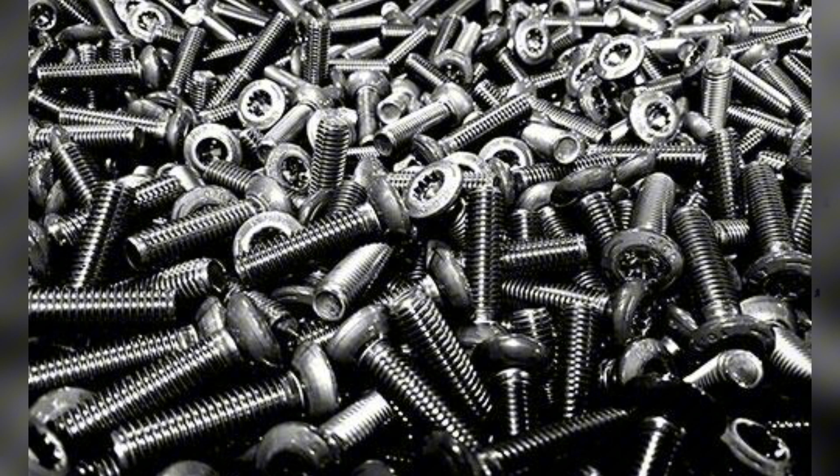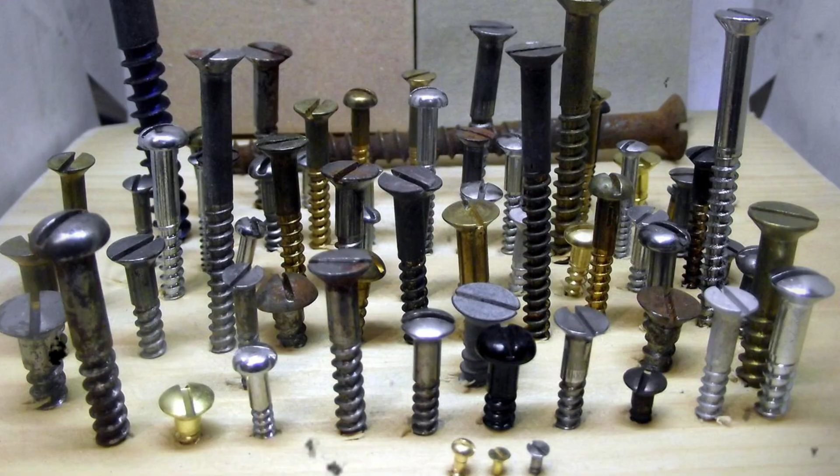As the 1980s gave way to the 1990s, the North American Free Trade Agreement fundamentally altered the Canadian industrial landscape. The border that had once protected Milton became highly porous. Tariffs vanished almost overnight. Multinational hardware corporations saw the Canadian market not as a separate, respected ecosystem, but as a minor northern territory to be flooded with globalized supply chains.

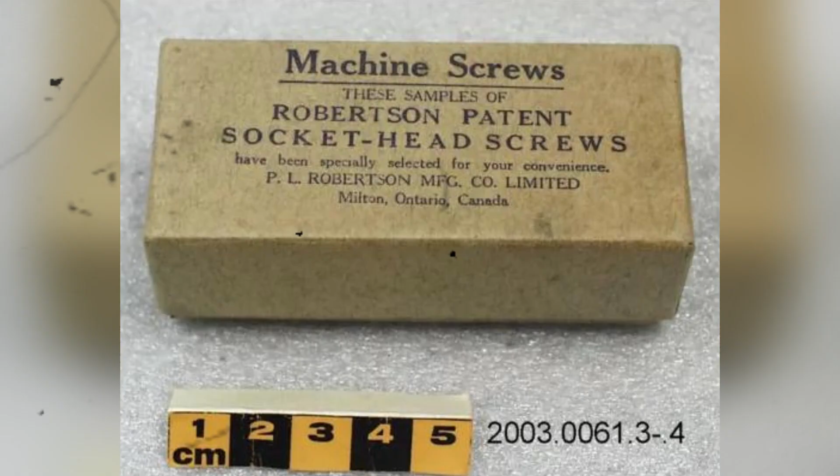The Robertson brand, now entirely stripped of its founder's fierce independence, was traded repeatedly between massive holding companies. It was passed from TransUnion to Marmon Group and eventually absorbed into the massive Infasco and Afas Group conglomerates. Each new corporate owner looked at the aging brick facility in Milton and saw a geographic liability. The raw Canadian steel, once the pride of Hamilton foundries, was becoming too expensive compared to global alternatives. The Canadian unionized labor, which had built generations of middle-class wealth in Ontario, was deemed a massive cost center that needed to be eliminated to satisfy shareholders.

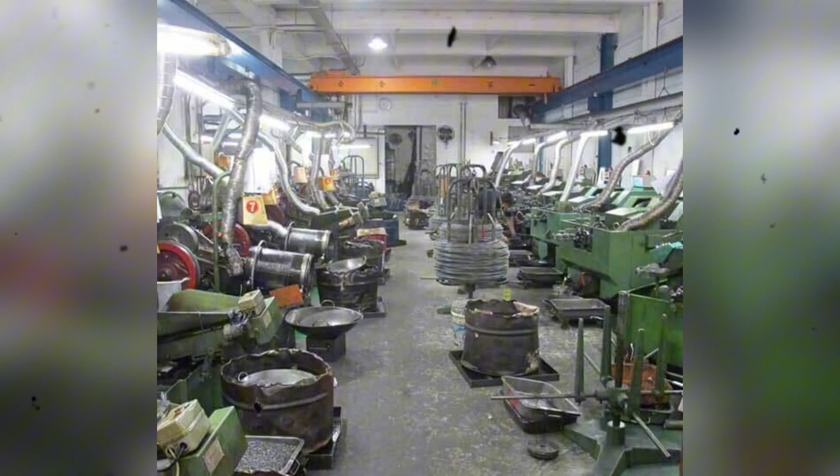Furthermore, the environmental regulations surrounding the heat treating and metal plating processes were tightening across the province. These regulations required millions of dollars in facility upgrades, capital investments that the parent companies simply refused to authorize for an old factory. In contrast, massive manufacturing hubs in Taiwan and mainland China offered cold heading and heat treating at a fraction of the cost. The harsh mathematical reality of globalism left absolutely no room for a localized, highly specialized Canadian tool plant. The parent corporations initiated a systematic, irreversible process of outsourcing the production of the very fastener that had built the town. It happened in stages, almost invisibly at first.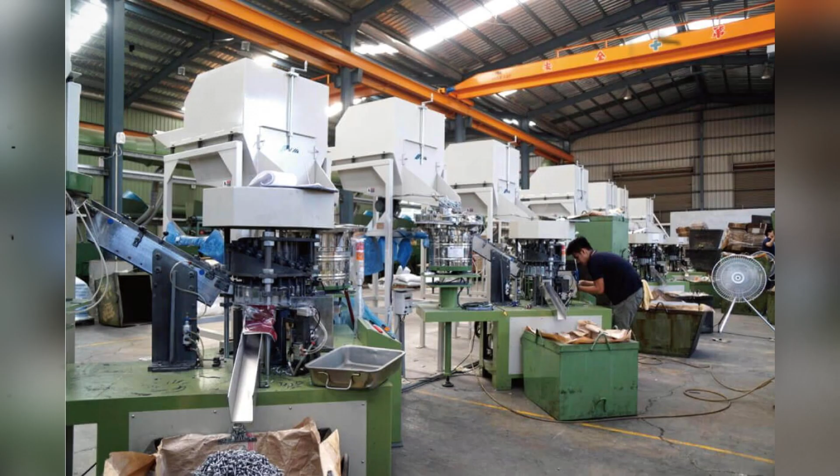The factory began importing raw steel blanks from overseas and only threading them in Milton. Then they outsourced the specialized low-volume fasteners entirely. Finally, the massive high-volume orders for standard residential construction screws were shifted to Asian contractors. Even the iconic color-coded screwdrivers themselves, the legendary green number 1 and the red number 2, were quietly outsourced.

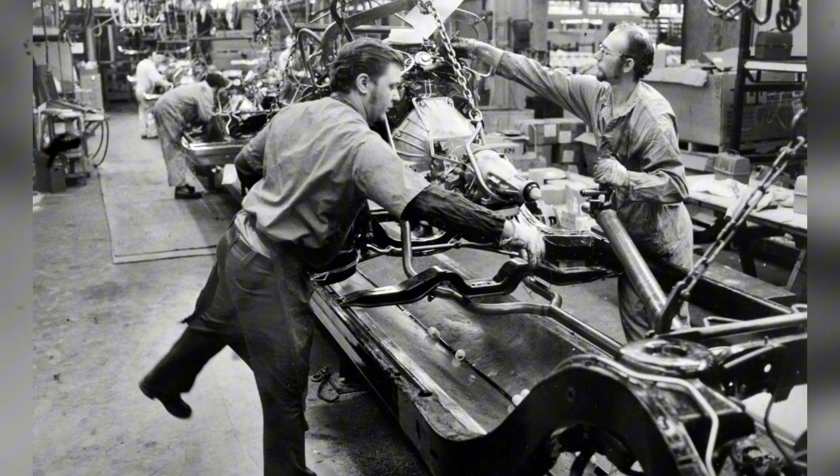The Made in Canada stamp, a physical mark of mechanical guarantee that had defined the tool for 80 years, was quietly erased from the stamped handles. This systemic shift was painfully visible in every Canadian Tire, Home Hardware, and local lumber yard across the nation. The heavy cardboard kegs proudly stamped with Milton, Ontario, vanished from the retail aisles. They were systematically replaced by sleek plastic tubs, imported blister packs, and generic cardboard boxes.

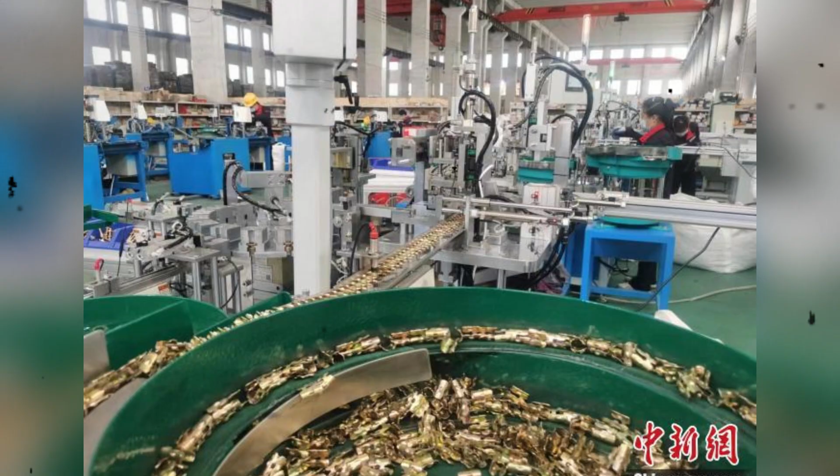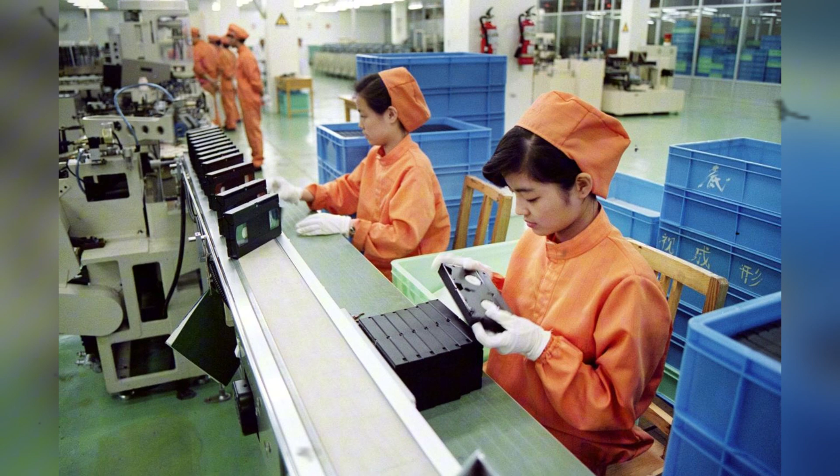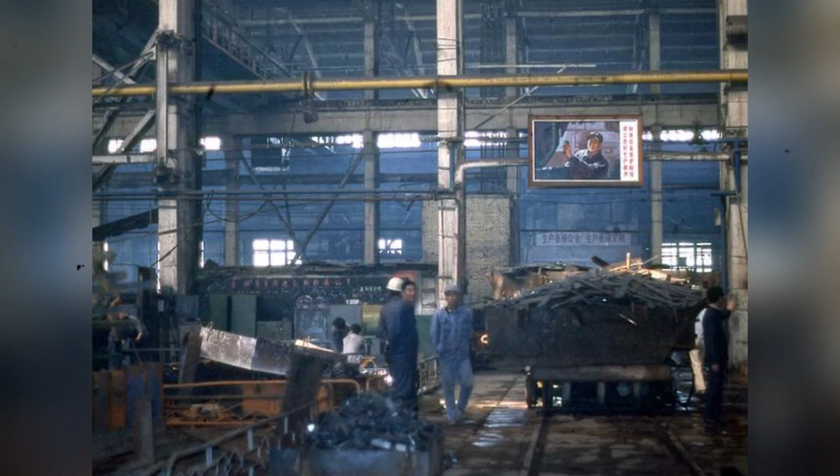The red-handled number 2 driver, the definitive, mandatory tool of the Canadian electrician, lost its substantial, heavy feel. The new plastic handles were injection molded overseas. The steel tips, while still square, lacked the absolute perfect friction fit of the original Milton cold heading process. The mechanics noticed it immediately. The carpenters felt it in their hands. The imported tool slipped just a fraction of a millimeter more. The grip was slightly less certain.

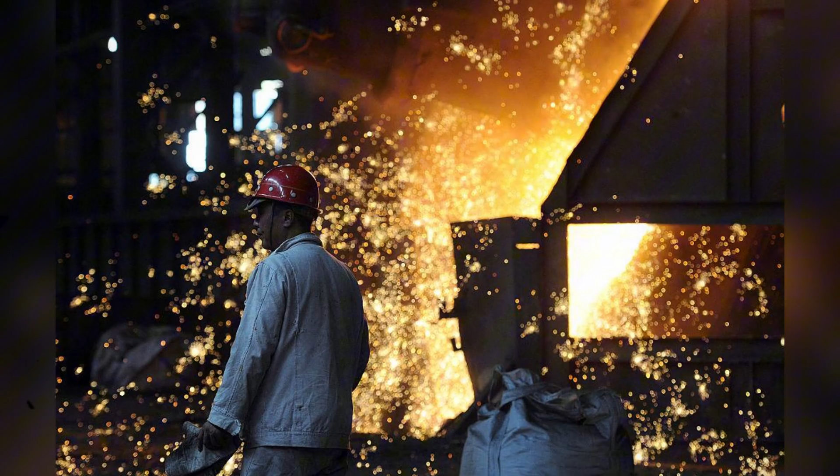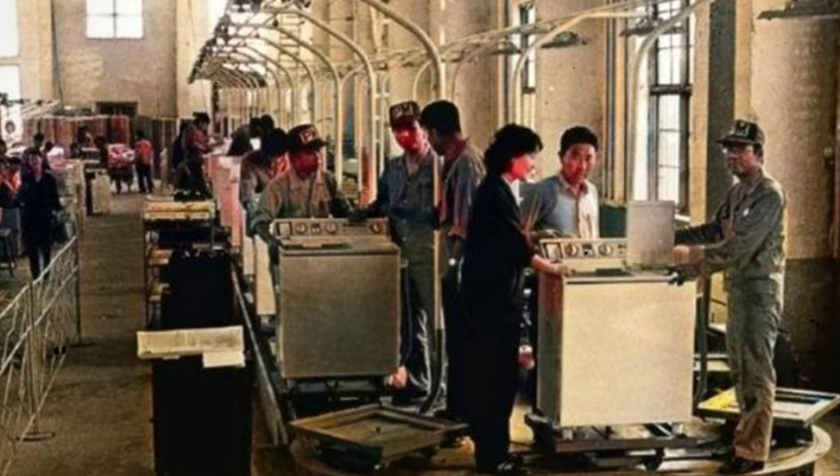When a framer in British Columbia tried to drive one of these new imported screws into dense Douglas fir, the square recess would frequently strip. The imported fasteners lacked the exact differential taper that P.L. Robertson had spent years perfecting. Foreign factories simply punched a straight square hole to save machining time, ignoring the slight, brilliant angle of the inner walls. Without that specific taper, the friction fit was completely destroyed.

The screw would fall off the tip of the driver. The worker needed 2 hands again. The fundamental defining advantage of the Robertson system was being erased by cheap manufacturing practices. Yet because the imported box still said square drive, the user blamed the concept, not the execution. The executives in Chicago and overseas did not care about a frustrated framer in British Columbia. They cared entirely about the unit cost. By stripping the manufacturing out of Canada, they maximized the profit margins on a legacy brand.

The P.L. Robertson Manufacturing Company had been reduced from an innovative engineering pioneer into a hollow distribution shell. They were simply importing metal from Asia, packaging it in a box with a Canadian heritage logo, and selling it to big box retailers. Inside the Milton plant, the corporate dismantling was clinical and entirely devoid of sentiment. The original patents were long dead. The Canadian manufacturing moat was utterly breached. The brand name Robertson survived, but it survived merely as a licensed trademark. The tool company was no longer shaping Canadian industry. It was just a ghost haunting the hardware aisle.

The town of Milton, which had grown entirely around the brick walls and the deafening rhythm of P.L. Robertson's vision, was rapidly transforming into a quiet commuter suburb of Toronto. The industrial identity was actively erased. The massive railway spurs that once carried millions of square drive fasteners to the prairies and the Maritimes were paved over, replaced by residential developments and sprawling shopping centers.

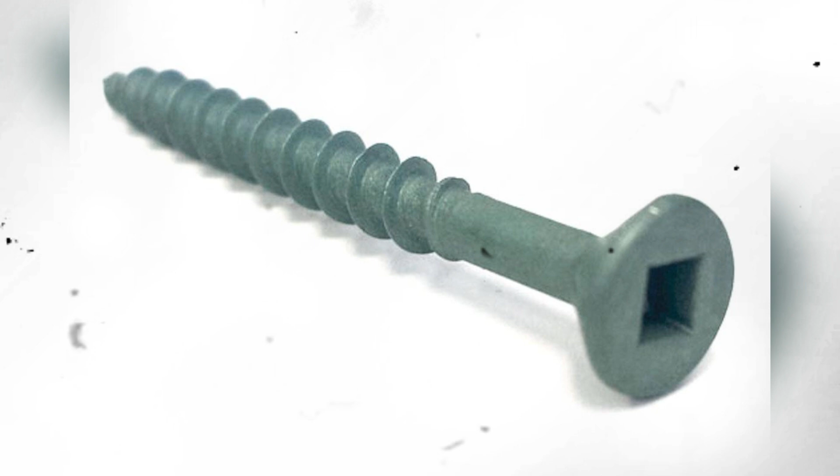The vital business decisions are made far from the quiet streets of Milton. The raw steel is no longer poured in Hamilton foundries. The cold heading process, the precise machining of the tapered recess, and the final stamping of the hardware are largely executed by anonymous contractors in massive, overseas industrial zones. The economic empire that Peter Lymburner Robertson built to protect his invention has been entirely dismantled, stripped down, and fed into the ruthless efficiency of the global supply chain. Yet the mechanical logic of his invention refused to die. In an unprecedented defiance of corporate absorption and global retail standardization, the Robertson screw survived.

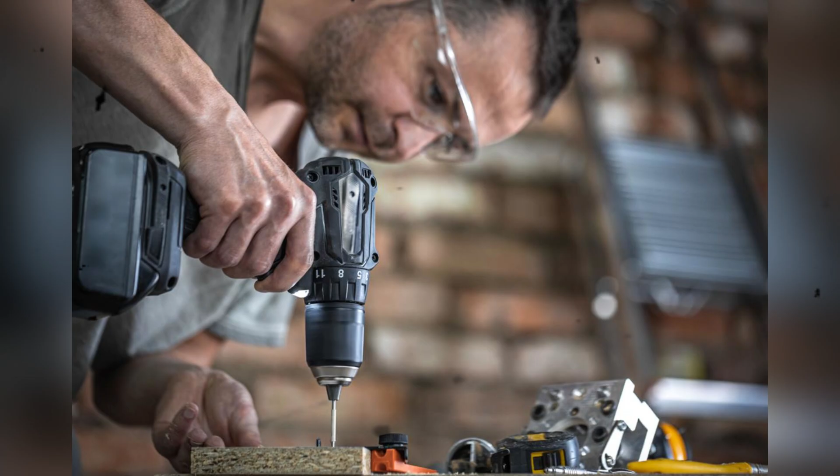It did not merely survive as a niche specialty item, it survived as the absolute, unquestioned, permanent mechanical standard of an entire nation. Cross the border into the United States today, and the square drive fastener remains an obscure anomaly, relegated to specialized woodworking catalogs and recreational vehicle repair kits. The American public continues to struggle daily with the cam-out, the stripped heads, and the inherent physical frustration of the Phillips system, a design fundamentally engineered for a 1930s assembly line constraint that no longer exists.

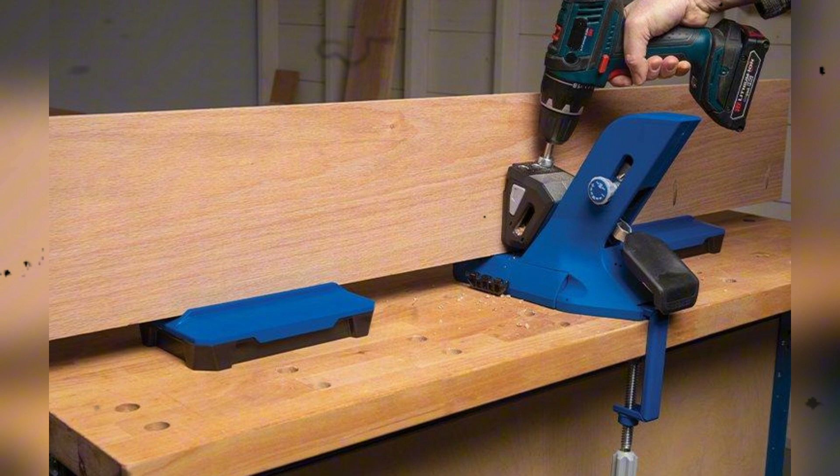But cross back into Canada, and you enter an entirely different mechanical reality. The Robertson screw is everywhere. It is an inescapable, foundational element of the Canadian physical environment. Go into any Canadian Tire hardware aisle, walk into any Home Hardware store, or visit any local lumber yard from Halifax to Victoria, and the visual evidence is overwhelming. The color-coded system, the green number 1, the red number 2, the black number 3, is instantly recognized by every single person who has ever picked up a tool in this country. It is a shared, unspoken national language.

The Canadian trades never let it go. The electricians refuse to wire a commercial building with anything else. The carpenters refuse to frame a subfloor without it. The cabinet makers, the boat builders, the maintenance workers, and the weekend garage mechanics implicitly understood the value of the friction fit. They understood the perfect torque. They understood that you could load a red-handled driver with a 2-inch steel screw, reach deep into a dark, cramped wall cavity, and drive it blind, perfectly straight, without a single slip. That physical sensation, that absolute mechanical certainty, was far too valuable to surrender to the cheaper, imported crosshead alternatives.

The Canadian enthusiast community, and indeed the entire Canadian public, fiercely protects the Robertson drive not just as a tool, but as a point of distinct cultural pride. It is a quiet, subtle reminder of a time when Canadian engineering successfully defied American industrial dominance. When Canadians watch American home improvement television shows, there is a collective national wince every time an American carpenter is shown pressing their entire body weight against a drill, desperately trying to stop a Phillips bit from camming out and destroying the wood. The Canadian viewer watches, confused, and simply wonders why they do not just use a Robertson.